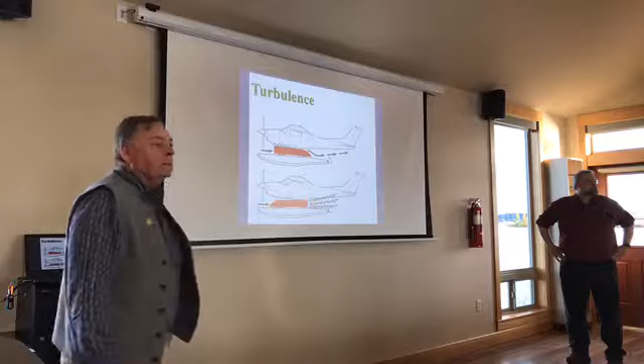Take a look at that picture. I can see everybody's sharp. Is this boat put on the correct way, or is it put on backwards? Correct. Why is it correct? Pardon? Tell me more now. I heard correct. Tell me more. That's true. Behind it. You want the blunt end forward? How come? Somebody said aero something? More aerodynamic. More drag. More drag, right? Yep. More drag.

The car goes down the road with the nose. It doesn't go down the road backwards. There's more drag. But what does it do? Take a look at the tail. What makes an airplane stay in the air? Wings, right? What makes it go up and down? This part, the tail. We want it to go up and down. We want it to get off the water.

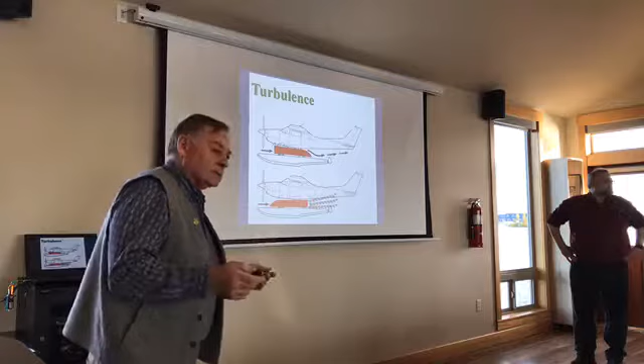So if you take a look at the bottom one, here's properly how you would put it on. So Bob, when he did it, he did the same thing. He canted it that way and he put the square nose forward. Keep this in mind when we're looking at a few other pictures here and some photos. I know last week when the power was out, we had a little session in the parking lot. It was kind of interesting how people had thought maybe some things could be done. But much more aerodynamic that way.

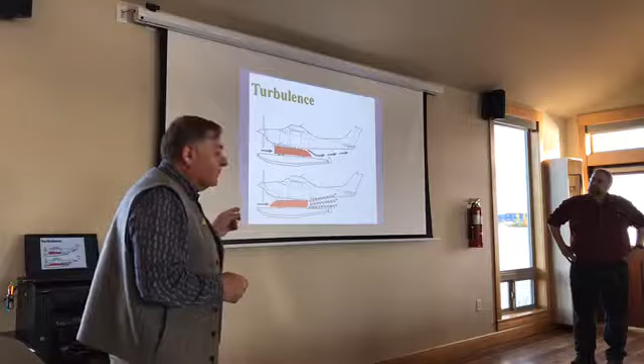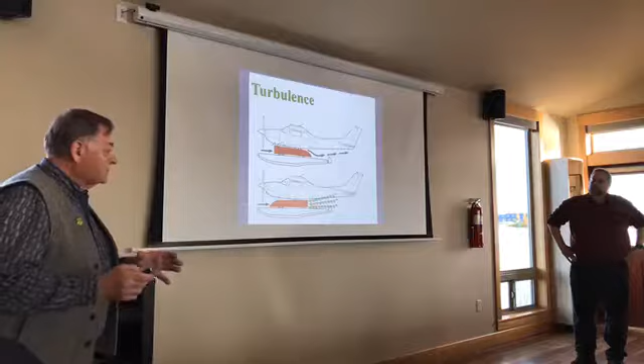That's the nice thing about some of our canoes, especially the double ends. You can haul it both ways. When you start hauling plywood, an outboard motor on the outside, or a four-wheeler, or two moose horns, things can change. Antlers, yeah, I used to call them horns. I'm not supposed to call them that.

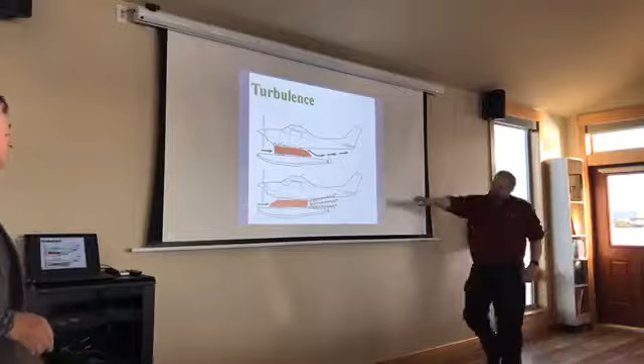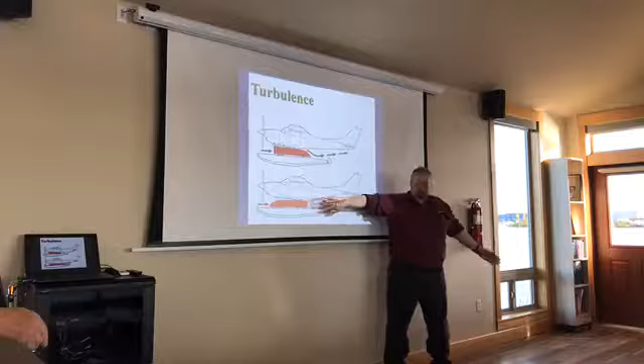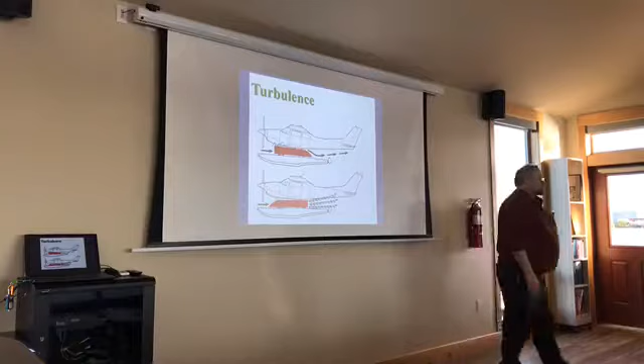The other thing about this is if you take a look at this kind of a situation where we're spreading the weight aerodynamically off of this object we've got on the floats, if it's only on the left side of the airplane like this, we may wipe out some of the control on one side, but we still have the other side. If we were going to do this on both sides of the airplane at the same time, we might have an airplane that was not controllable. Even though we may be able to get away with it with one half because we're only wiping out half or maybe a third of our elevator control, if we do it on both sides, we may have a problem.

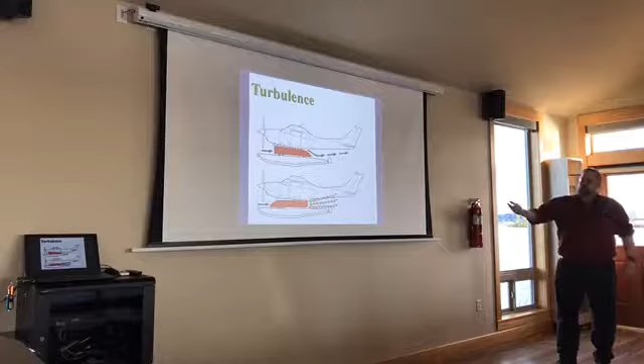So there you go, blunt end forward first. Not necessarily blunt end first, but let's keep the tail clean. I'm going to show you in another couple of photos why it's very, very important. Dave, this is a little bit you, so I'll let you carry on.

Okay, so a few years ago when we were trying to take this policy national, we did a good search over all the serious accidents where somebody was either seriously injured or killed. And going back through the entire population we have in the NTSB database, we've only had these three. So I would say this is a pretty good safety record given the number of these operations we have. However, we can still learn a few things from them.

So the first one that I'm going to talk about is also the most recent. We had an accident out near Rhone. It was taking off over, actually, let me skip that one because I've got another couple slides. But notice here, he was carrying antlers and a rifle scabbard. There were two sets of antlers, one on the left, one on the right. So we've got blanking over both sides and the additional drag of the rifle scabbard. And notice he was 642 pounds over gross. That's a lot.

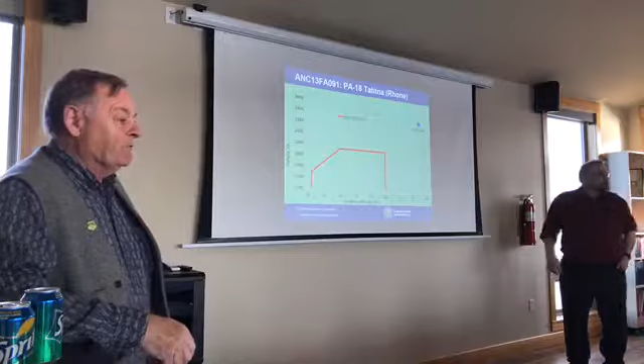You want to go ahead and get next? Yeah, this is pretty revealing here. So we all knew we'd do a weight and balance, right? Sometimes we do one afterwards. It's kind of interesting what the weight and balance tells you. Dave, you drew that up, so I'll let you talk about it, but we know what this is, right? It's called the envelope. And in case we have a little mind lapse there, we're at 1750 for a PA-18.

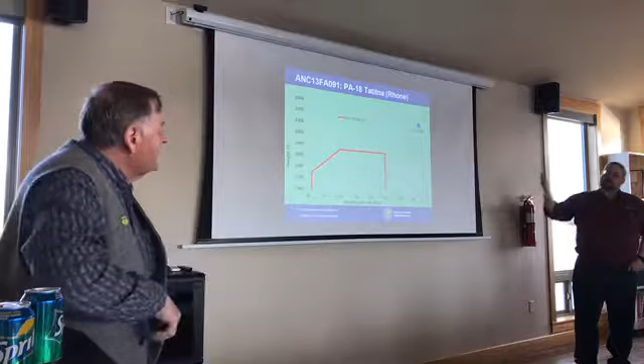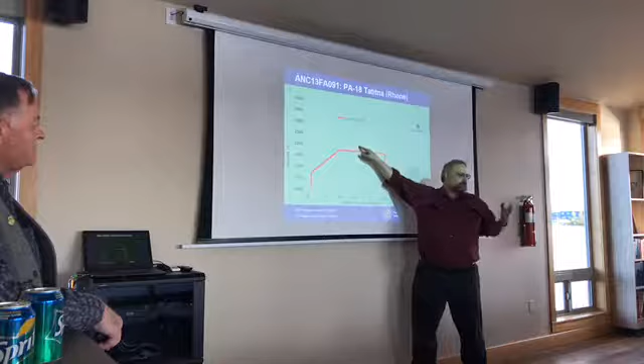Now, having done a lot of flight tests over the years now, and developing this, I know why I drew that line on the airplanes I drew the line. Being up here, that's bad. It means fatigue, it means lower climb performance, all of those things. Over here terrifies me, because I know I lose control of the aircraft over here. So in the Super Cub, typically when we're overloading them, we're overloading them aft.

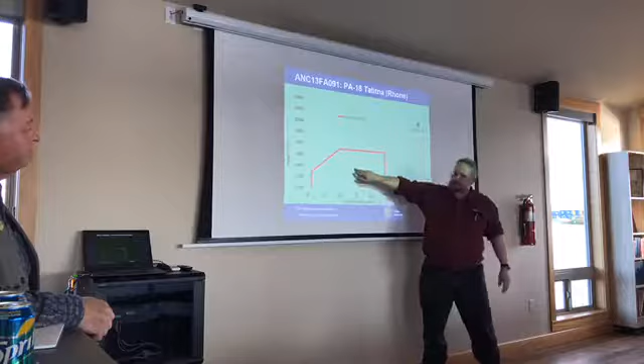So for this, you know, if I were going to fly out the caribou antlers, you want to do it down here. So that's probably me, enough fuel to get out to another place to land, and then I'll come back for all the rest of the stuff and the other person at a later date. Make 2 trips out of it. He was only about 20 minutes from a really big airport. So there was no reason this had to happen.

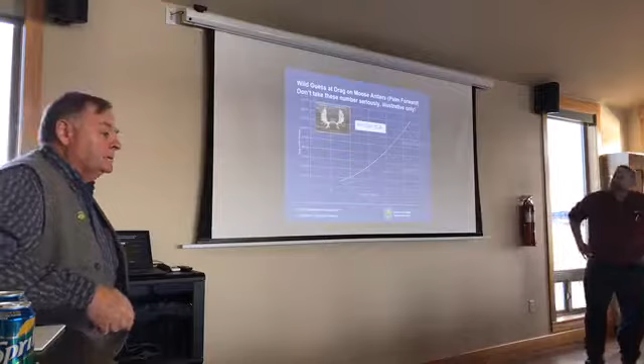And one guy is unfortunately dead. And a good person and a good pilot that made a mistake. But that aft CG is what really gets me. So I talked earlier about tying a moose horn on the jury strut, probably of a PA-18, and you didn't get too much feedback there, and I said, we'll just cut it in half and put it in.

So how much drag does it really cause? I'm not the aerodynamic guy or the numbers guy, but Dave is. And I think you have a way of comparing this to a Borer prop? Yeah. So these are guesses, because we haven't put a set of moose antlers into a wind tunnel and done a good NACA wind tunnel test. But there's a book called Hoerner's Fluid Dynamic Drag that I can estimate what the drag coefficient on various things is. And I can get the area of a set of moose antlers.

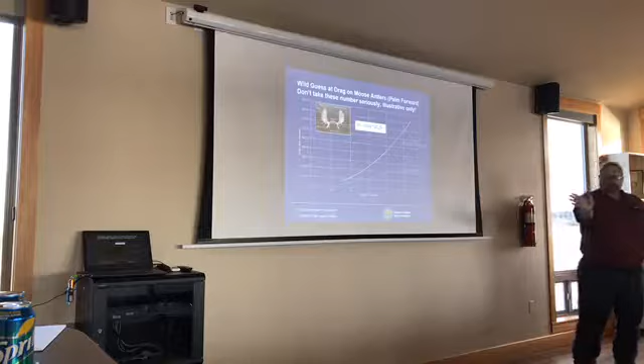Now, unfortunately, because moose antlers tend to curve, you know, there's that upward curving palm, the correct way to install them is what you'll see in a couple of slides. But let's say, for the purposes of discussion, I was going to put those palm forward, so I'm like a charging moose coming at you. This is the maximum drag that you could probably get. And I run that calculation, and if I were going, say, 60 knots, with a barely legal moose, I've got about 110, 120 pounds of drag. If I've got the world record, I've got about 250 pounds of drag.

Now, for example, if I were to chain a Super Cub down and put a load cell on it at full power with an O-320 with a Borer prop, I'm probably going to get around 800 pounds if everything's tuned up and I'm getting a good pull on the prop. And it's a flat pitch climb prop. So I'm using about 1/3 of my available power to drag the moose antlers through the sky.

That will mean a yaw angle on the airplane, because the airplane's going to try and yaw on me because I've only got them on one side. That means that in order to correct for the yaw, I'm going to have to step on the rudder. So I've got rudder deflection that's also causing drag. As soon as I put in rudder, what do I have to do with my ailerons if I step on full rudder to keep the wings level? I've got to put some aileron in. So I've added drag in 3 different ways, 2 of which are not quite as obvious.

So I add quite a bit of drag when I do this, and if they're big moose antlers and they're not oriented properly, the drag gets bigger and bigger and bigger. Now I don't want you to take away that this is the exact number, because I'd know the exact number only if I had NASA's wind tunnel and could put a set of moose antlers in it and measure it directly. But this is probably a worst case of what kind of drag you might get on a set of moose antlers.

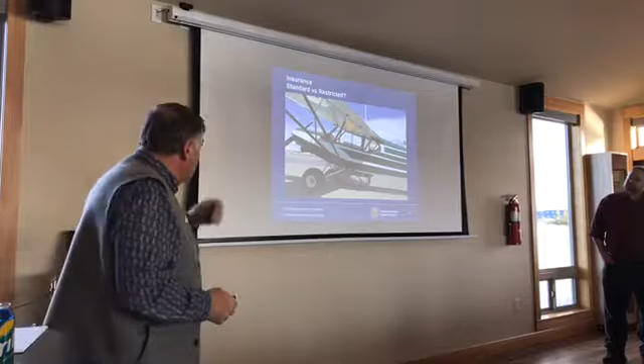Okay, Dave talked about that piece of paper that we didn't want to go to the FAA and try to go get and all that stuff. I'm insured with Avemco, been with them for quite some time. In my commercial business, I was also insured with them and a couple other underwriters. They said if you have an external load certificate and are operating with that certificate, still at a standard, you're covered by our insurance. That was pretty good to hear.

I don't know if things have changed, but it always seems that when you're trying to do something, things can kind of get a hold of you. The little propane bottle on there, we'll talk about that in a little bit. So that little bit of effort that Dave was talking about, getting that restricted thing, it's going to keep you away from that thing. Plus, it's the right thing to do.

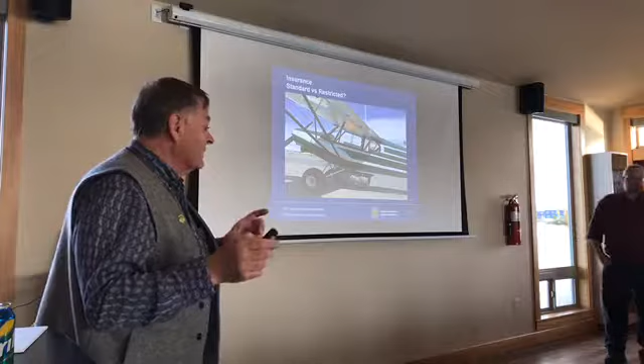You will find most of these that are out in the weeds there still stay out in the weeds. Nobody wants to bring them back. A lot of the folks around here won't fly these loads anymore. So what seems very, very simple, very, very easy to do, could cause you some trouble if you don't have some experience. If you don't know how to do these things and you're going to do them, go over, get the certificate, go over and talk to those guys that do these all the time. They'll tell you the do's and don'ts.

Rigid insulation is another issue, because if the insulation panels do this in flight, you're probably coming down. You may not like the location. Yeah, so go ahead. If you have the handyman's secret weapon over there, do you want to talk about that? Yeah, so what Dave is talking about here is, let's say you want to take some metal roofing. Pretty easy to put on, right? You want to take it out to your cabin and put it on the spreader bars, right? It's going to be the front, right?

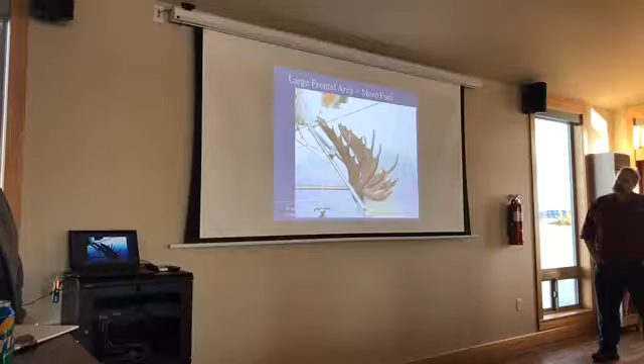Again, some old time pictures. I was going to change them out, but you know what? They still tell the same story. Large frontal area, Dave talked a little bit about that. You are going to use a little bit more fuel, so if it takes you 2 hours to get out in the PA-18, and you've got another tank with 2 hours, and then you shoot that moose, and you went out in no wind and come back in no wind, you're not gonna make it. You're gonna land a little bit short.

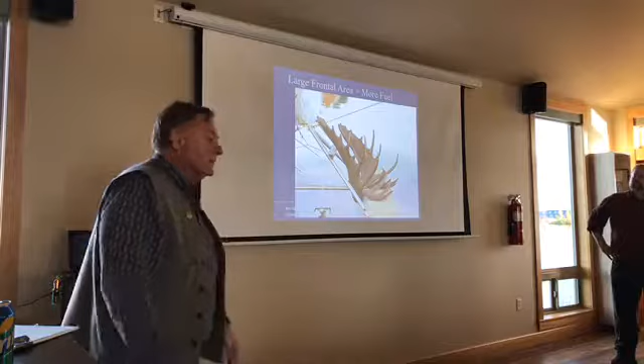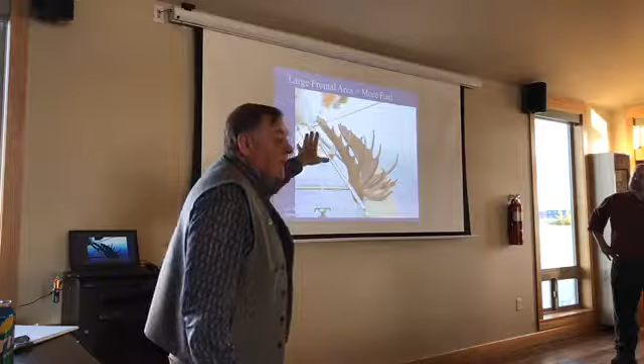I, at one time, had a couple of moose, put one on one side, one on the other, airplane wouldn't fly. Didn't know why. Put the moose horns all on one side, flew away fine. We know why now, don't we? Blanking out the tail. That's exactly what I was doing. I didn't know that. That's a very good, safe way to do it. You can't see the stabilizer back there, but you can tell it's pretty clear. But I had these both on there, and I had them towards the aft. They weren't on these whip lines. And the airplane just wouldn't go.

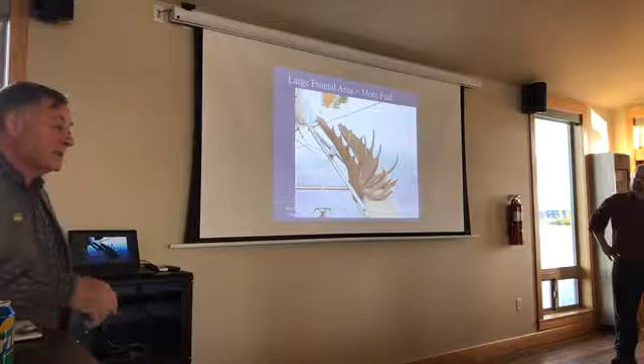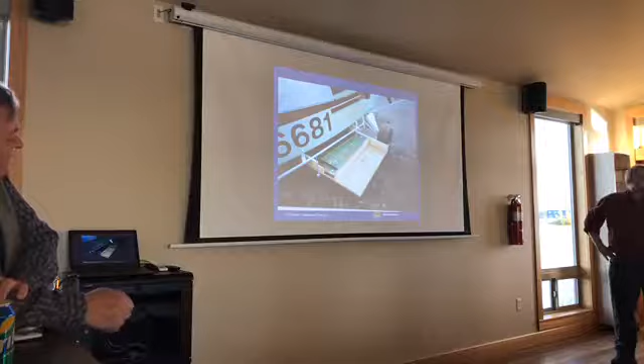One tough thing about external loads, and you're not going to like to hear this, they like to get off the water or the land, but they don't like to climb. And my guess is that's a little bit what happened in the Rome River there with Scott. If you want to take some big windows out to your cabin, there's ways to do it. You notice there's a lumber rack on here. Well, you can get an STC for a lumber rack, or one of the guys will give you a field approval to put it on. Still don't mean you got the pink piece of paper.

You got to come back and see this again. Actually, there isn't an STC for the lumber rack yet. Oh, there is none? No. I thought that was one. That has not been issued yet. So we don't have the approved load rating for the lumber rack, but there's a lot of experience from people who have done it in the past.

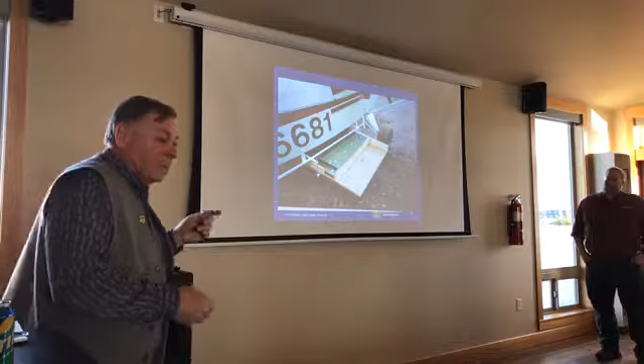So the neat thing about this is if you want to take a window out to your cabin or something, there's a way you can do it. Just build a frame around it, go ahead and put it on your lumber rack, and fly away. No big deal at all. Try to re-inspect your load.

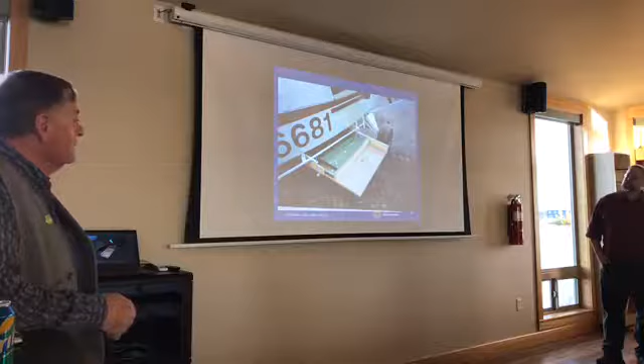Today's world, we got cell phones going off every 10 minutes. Mine's went off 5 times, and I'm not a big cell phone user, so something must be up. It seems as though it's pretty easy to get distracted. You have somebody help you or something like that, and you forget to put a clamp or a bolt in or something like that.

So in the case of Barry Stanley here, this is a picture of his airplane. He's got a couple sheets of 3/4 plywood. He's got a nice window in there. The thing about these lumber racks, there's a couple ways to haul this lumber. Take a 4x8 sheet of plywood. We looked at it on that float, right? 1,000 pounds, right? How about if you turned it sideways? Still weighs 1,000 pounds. Your CG would be further forward.

And I'm almost willing to tell you, because I know this. You put a little metal over there, or an old leading edge off one of these wrecked airplanes, screwed it on, you actually have another wing under your airplane. So a lot of people carry the plywood lengthways. If you just turn it around, you make your life a lot easier. Now, if you do build a wing under your airplane like that, think about the incidence angle of the wing in flight.

So you've got your main wing, the one that Cessna or Piper built. It's got a certain wing incidence angle, so you're flying along with a certain angle of attack. If your plywood, your biplane wing down here, is 4x8, it's going to be about 1/3 of the wing area of a Super Cub. If it's at an angle equal to the incidence angle of your main wing, but downward, it's going to cancel out about that much of your wing lift. So if you want it to help you, you want it to be about the same angle as your main wing, and not hurting you.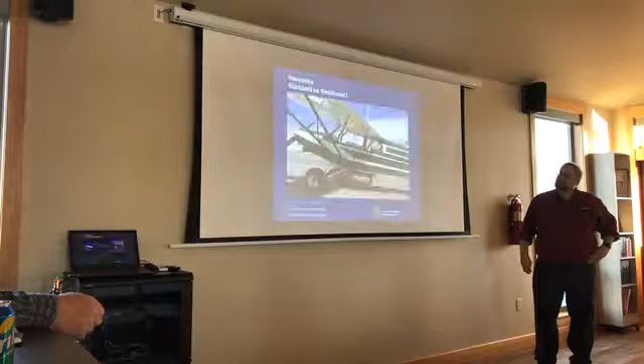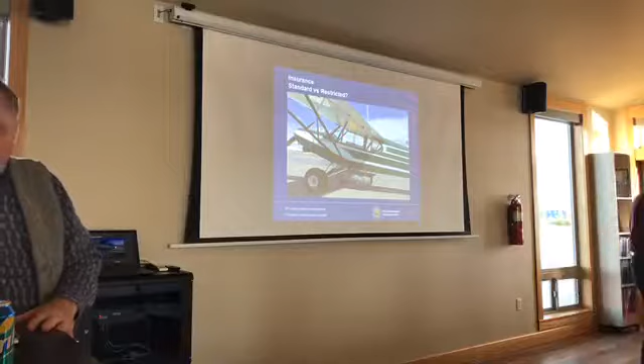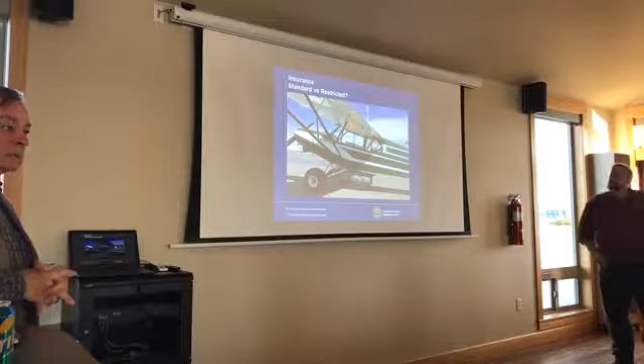So anyhow, in the advisory, you need to have that restricted in there. If you look at that, you know that it's external load. When I first started working for Flight Standards, everybody asked me what I know about external loads, and I said, I don't know. I said, let's go put a 100-pound propane bottle on a Super Cub. You can't do that. And I said, we can too, because this is how we used to do it. I'm not saying this is the smartest thing in the world, but it can be done.

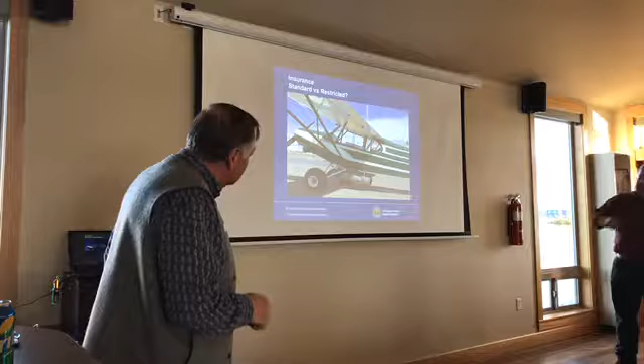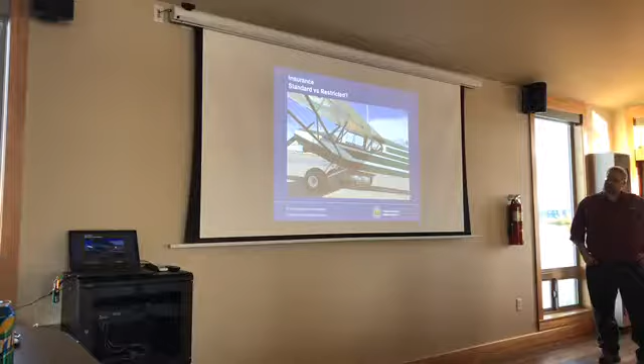So what you do is you take the cap there, tie that up to the cabane, and you take the back and tie it to the float fittings, right? Great idea. 100-pound propane bottle, right? You guys or gals know what that means? It means there's 100 pounds of product in there. It means the bottle weighs 80. So it's 180 pounds. That's quite a bit of weight to have down there, isn't it?

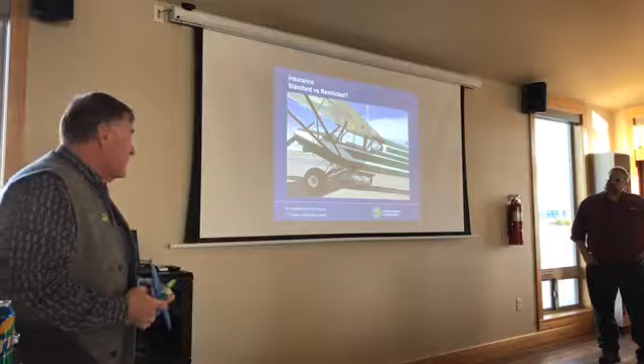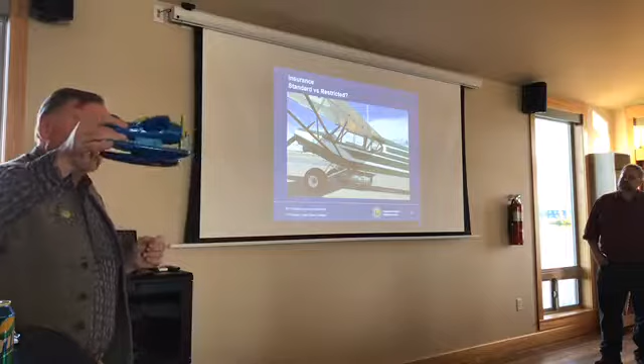And so the good thing about it, when you decide that you want to go to the moose camp or wherever you're at, and you're the pilot or the hotshot because the weather got nice and you're heading up there, and you decide you're going to fly along with your external load and your little pink piece of paper in there that keeps you safe. And now you come to moose camp, you decide you're going to descend in there, right? So you're going to nose down, right?

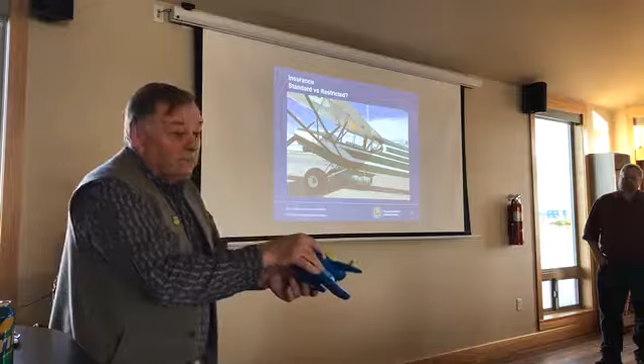What happens to the airspeed? Man, it starts building, right? What happens to that propane? 100 pounds, it moves forward. That's okay, right? Man, I'm really going fast. This is good. I'm going to give them a good buzz job, right? Because these things do happen, believe it or not.

And so a buzz job always looks better with a turn, don't it? So what happens when you come down, pull up and turn? Where does your 100 pounds go? Shifts back again. So be careful when you start to do some of these things. I did this for a fair amount of time up in the Wrangells. It was a short flight, maybe 20 minutes. Probably not the smartest thing to do.

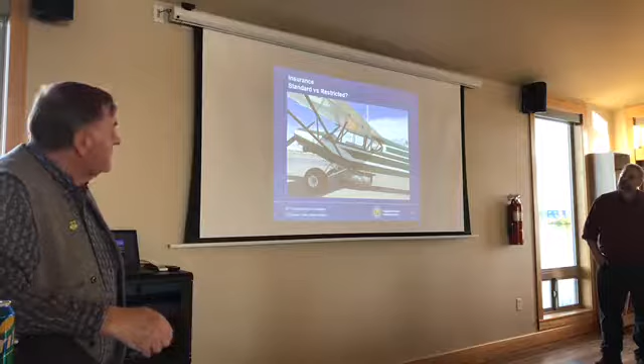Where the gal said, why didn't you buy some of those aluminum ones and put them in the back? I said, well, we just thought that was a better thing to do, kind of like tying the rack on. So I wanted to make that point. But you should be able to grab a hold of that thing, move it sideways, shove it pretty good, move it sideways. If it stays put, that's good.

You should be able to lift it up, push it down, push it forward, pull it back. Do those kinds of tugging on it before you leave to make sure it's really secured and doesn't start to move. And those CG shifts in flight are not fun. So when you do get the permit to go over there at Farewell and get the bison this winter, this is the way you get your snow machine over there, 'cause it's not very fun walking around.

There is a lesson I did learn from this, by the way. You see there's no windshield on there, don't you? It wasn't because I took it off, it was because it blew off. So take the windshield off. This was kind of put on by some complicated means. We took a float strut and welded it down there. But the real important thing is do get that little piece of paper. Take a piece of paper. It may seem silly at the time, but it's not so silly.

Because what happens is when you start looking through this advisory circular, you're going to find out there's a lot of things that Dave and I talked about here tonight and that you kind of know about. So that's going to be a good thing. Start with small loads. Forget that 1,000 pounds. Make a couple trips out there. Check with pilots who've done a similar thing. I can tell you that guys down this road here, who I know very well, would be glad to tell you what not to do. And we talk about the stabilizer. Keep that clean, huh?

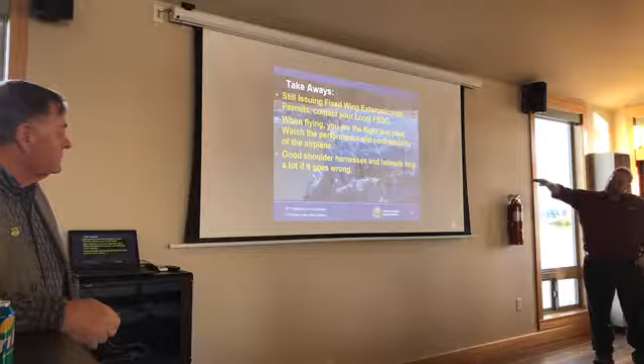Yeah. One of the major takeaways of that particular one is that when you do this kind of operation, you are entering a world that has significantly more risk. That's why it's a pink airworthiness certificate. It is a special airworthiness certificate for special pilots. That's why we've got the extra hours, and it's an acknowledgement that you are absorbing more risk. That's why it says restricted on there, and we tell you don't fly over other innocent people, and don't fly people that aren't involved in this, that aren't aware of the risks that you're taking.

So you can do a lot to mitigate this by wearing a helmet, getting a good 3-point or 4-point shoulder harness into the airplane. Because anytime you fly out in the bush and you do this kind of stuff, you're accepting more risk. So it's a good idea to do some things to mitigate that risk.

Any external load questions? I know how that works. It's always afterwards or kind of a week later. So feel free to email, call, contact Lambert.

Wouldn't it be preferable to carry the loads underneath the aircraft? There are all these belly pods with attachment points, so there's a way to attach it. It will be harder to load, but you wouldn't have all these lateral problems and blanking out the elevator. Yeah, and that's actually getting pretty common. A lot of people are taking kayaks, putting them under 182s. I saw one the other day under a 172. I talked to the guy, asked how's it flying? He says, fine. I just kind of tie it on, make sure it doesn't move and all that stuff.

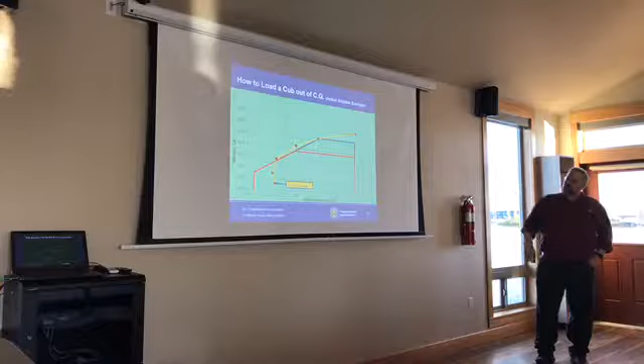I was going through the accident statistics a little while ago, and this last chunk, we had a pretty good chunk of mechanical failure accidents. And this is a random collection. Some of these are mechanical failures because the mechanic did something wrong, but some of them are because the pilot did something wrong. So these are the ones that have happened since October of 2015 through when I collected the data on April 1st. So we've had 6 different accidents.

The most recent one, the ailerons were jammed for some reason. We don't know why, but the ailerons were not functioning. It was a fairly serious injury accident, but fortunately nobody was killed. When we look back at the statistics from a long way back, when an airplane comes out of a major service, the probability of having a control accident goes way up.

Now, if you're doing an annual on an airplane, always check the actual deflections with like a prop protractor, or do what Mike is saying, make sure that your ailerons are doing the right thing, right? So when you do this, make sure your ailerons are moving the right way. The elevators are more difficult because you can move your stick back and forth, but you typically can't see what the elevator is doing back there. And so it's better to do that during your pre-flight, standing here and going, okay, what's that gonna do?

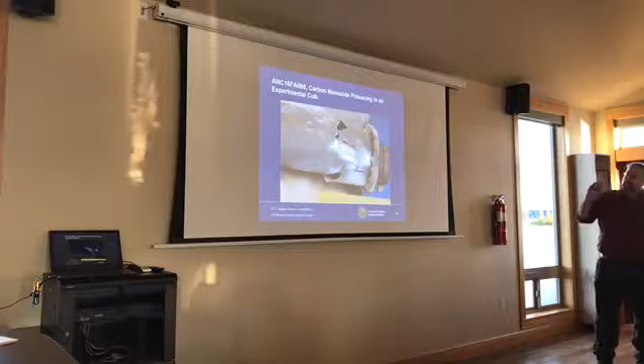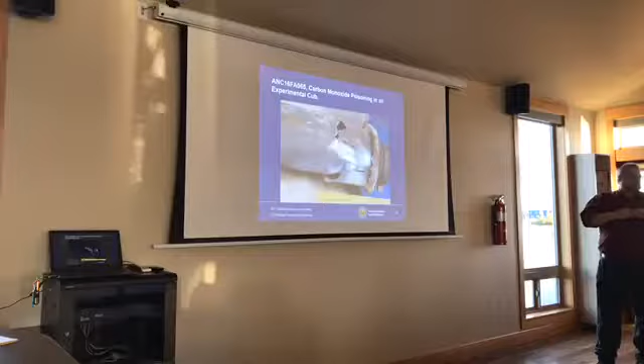So this was off an experimental cub, and this is essentially very similar to what you would see on a certified cub, and also a lot of other kinds of airplanes. The blood toxicology showed an extremely high level of carbon monoxide in the pilot's blood. We went through a lot of stuff to validate that yes, it was a valid reading, and the pilot probably lost consciousness because of carbon monoxide poisoning.

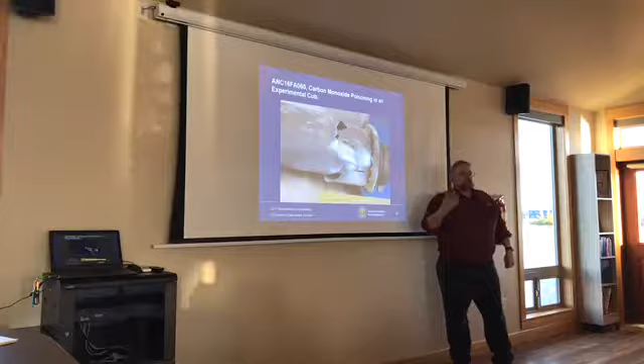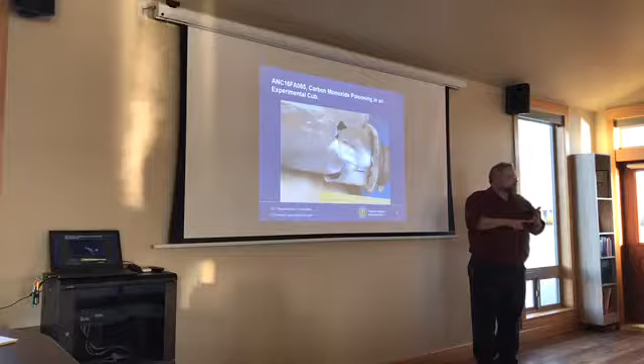This was the heat exchanger that fed the cabin heat. Now we're about to go into the winter flying season, so we'll be flying with that heat knob on. You can't always smell carbon monoxide in exhaust, especially if the engine is operating properly. So if your mixture is set correctly, and you're not burning a lot of unburned hydrocarbons, carbon monoxide is odorless and has no appreciable smell.

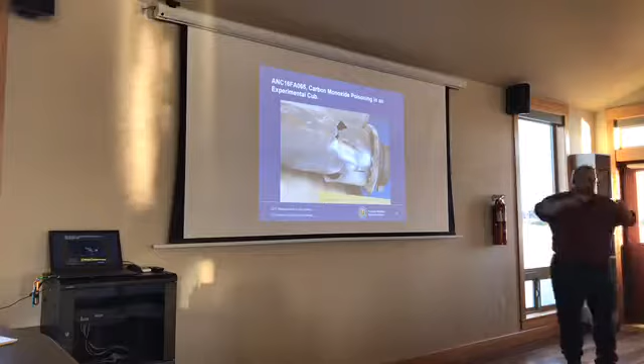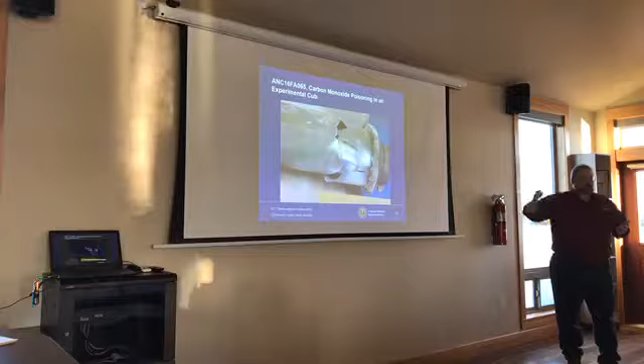So the first line of defense for this is every annual inspection, pull that shroud off of the heat exchanger and look at it. And if you do that, you can see this kind of stuff. There's also a pressure check you can do. Plug it up, pressurize it. That'll show you if you've got problems. Also get a good carbon monoxide detector in the airplane, and that'll also mitigate it.

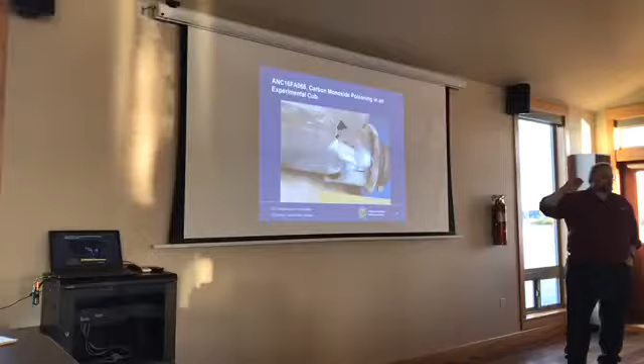Can you advance the slide? Okay.

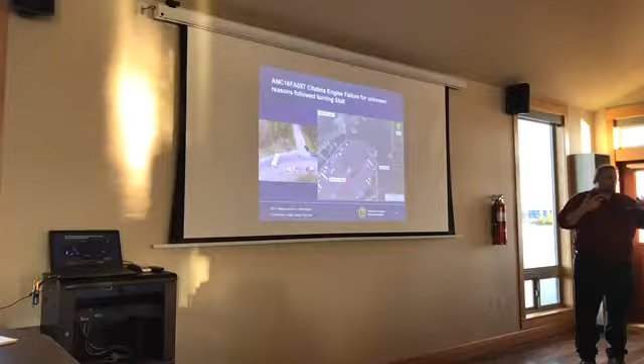This is an airplane that hadn't been flown very much. Been sitting for a long time. Did a couple of circuits and then decided to take off on the gravel strip at Birchwood. During the takeoff, he had freshly refueled. Fuel samples were taken. There wasn't any contamination in the fuel, but it may have stirred up sediment in the tank. We don't really know for sure why the engine quit, but it quit, and he apparently tried to make a turn back to land and was unsuccessful, and he did what we call the impossible turn.

So the biggest takeaway I can think of for this accident is there actually are some places in Birchwood you could put this airplane down without killing yourself if you had planned on it ahead of time. The first thing, when you get a true engine failure, the airspeed will drop very quickly. You need to get the stick forward or the yoke forward and maintain that flying speed. The first rule is fly the airplane. Then you can start putting a little mental energy on where to put it down. But first, fly the airplane.

Do not stall it. So in this case, he stalled it. And we don't know why. There was a large post-crash fire. Next slide.

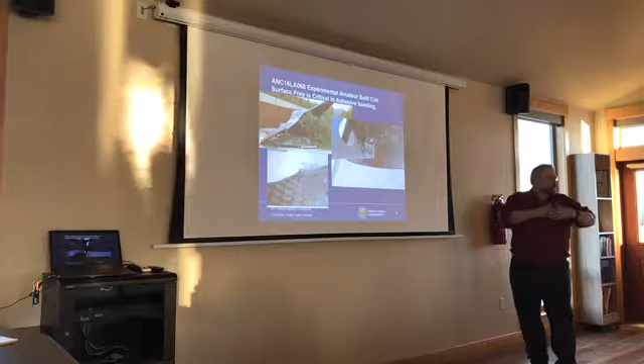So the advice on that one is, first of all, do the maintenance and make sure that you really are confident that the engine really is going to run. Airplanes that sit a lot have a lot of problems with fuel contamination due to water. And we don't know that that was the problem, but it's one of the possibilities. Water does accumulate in fuel tanks over time. The Cessnas with bladder tanks especially tend to trap water in the wrinkles in the bladder sometimes on the bottom. So really do a good job of doing that.

Now this is on the surface prep. Notice the weave here, but you can also see this little mottled area. That was where the release material, when they laid up the part, they put a release film, and then they peel that up once the part's cured, and it leaves that contamination behind. So this was the tab. It's a little hard to see in the picture, but this is a dual fork. This piece was supposed to be in here, and notice here, it came away with some of the glue, and the rest of the glue is in here.

It didn't adhere. So there wasn't good surface preparation here and inside this little clevis, because it's a two-sided clevis, and it's very difficult to get anything in there to really clean up that surface. So as you're getting into more and more composite airplanes, surface prep is next to godliness in terms of adhesive bonding. And second to that, of course, you've got to mix the adhesives right and all that stuff. But if you don't get the glue to stick, you're not going to get a good structural product.

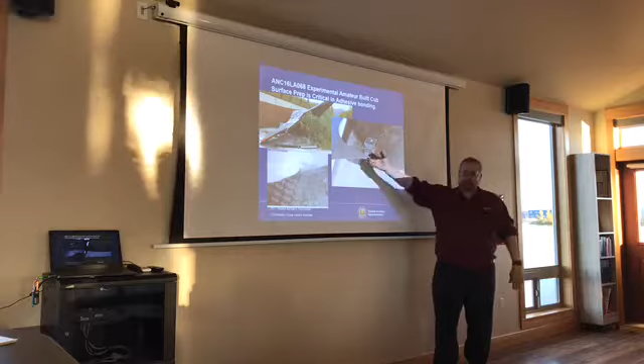Okay, go ahead. I think that's about it. Anyway, I'm free to answer any questions. No questions. All right, that's a good sign.